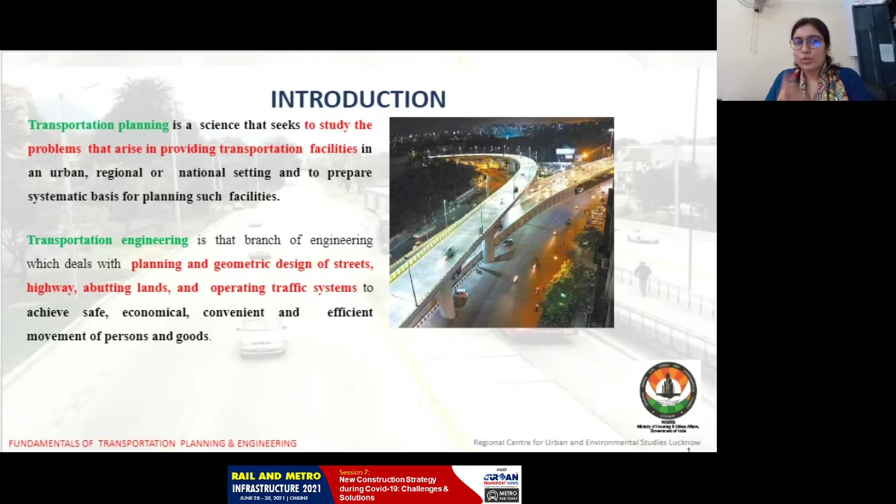So here we are going to discuss what construction strategies will be adopted in the post COVID-19 scenario, as here we are talking on urban transport. So first I would highlight a major difference between transportation planning and transportation engineering, because these two terms confuse us every day about which type of construction strategy should be adopted, either in transportation planning or in the case of engineering. Okay, so yesterday we were also discussing what we should do in a post-COVID scenario.

So when we talk about providing transportation facilities, the problem which we see in day-to-day life is providing the facilities to middle income group people, low income group people, or any of the people in the society who are using transportation. And when we talk about transportation engineering, it is how we design the streets, the highways, the abutting lands, the traffic systems. What should be the design so that it will cater to less population in a small area, or more population in a small area.

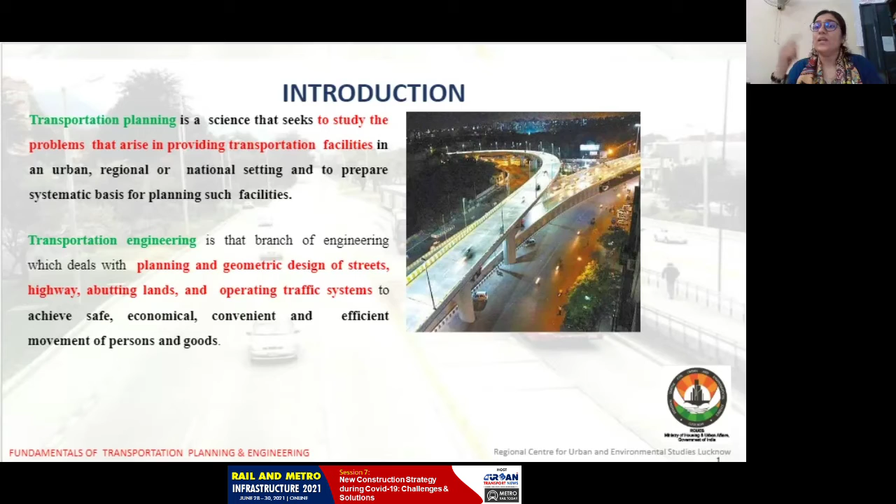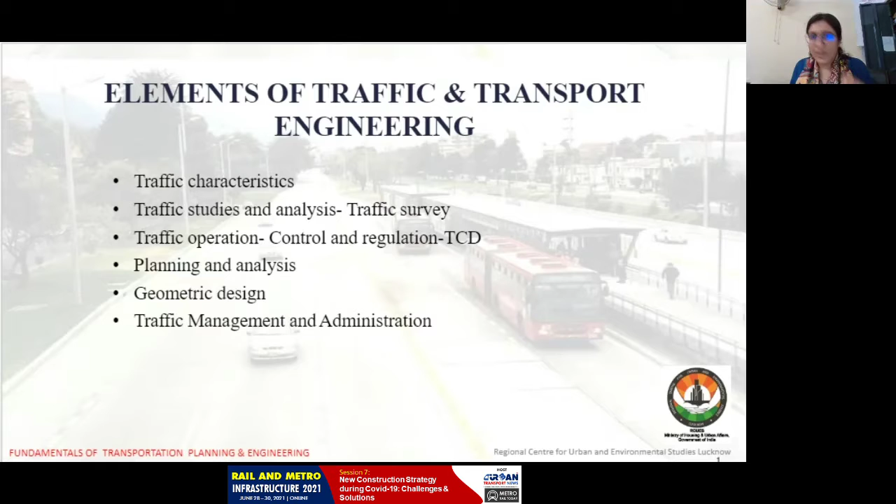Okay, so these two are very important. Before understanding what the construction strategy should be, it is important to understand which type of construction strategy should be adopted, either in transportation planning or in transportation engineering. So here is a small presentation. Strategies can be characterized: there should be separate strategies for traffic, for planning, for geometric designs, and today we also need to adopt good strategies in traffic management as well as in administration. Okay, so here are the factors which affect traffic.

We have four factors: the vehicle, the roadway, the environment, the road user. The road user can be a permanent user जिसको हर रोज ऑफिस जाना है. It can be a temporary user. I am just going to Ahmedabad for one day, I am going to Bangalore for 2 days, so we are not permanent users over there. So this is the road user.

When we talk about the environment, it is very important before any type of design that we go for orientation. Being an architect, I always design a home oriented with the sun and the wind direction. But in transportation planning and engineering, it is the need of the hour that we consider the temperature of a particular area, the heat, the cold, the fog. Because of fog, so many accidents occur every day.

And the roadway types: the different types of surfaces and textures which can be provided, how the drainage affects the population, the weather resistance. These are all factors which should be considered, especially post COVID, not only in COVID but in day-to-day life, but now as we are facing a very huge pandemic, it is the sole duty of planners, transport planners, to adopt these types of strategies.

And the foremost, which is first on the list, is motorized and non-motorized. हमारा जो वाहन है, the vehicle: non-motorized and motorized vehicles must have different types of lanes, different types of transportation facilities. We are going to different slides like this.

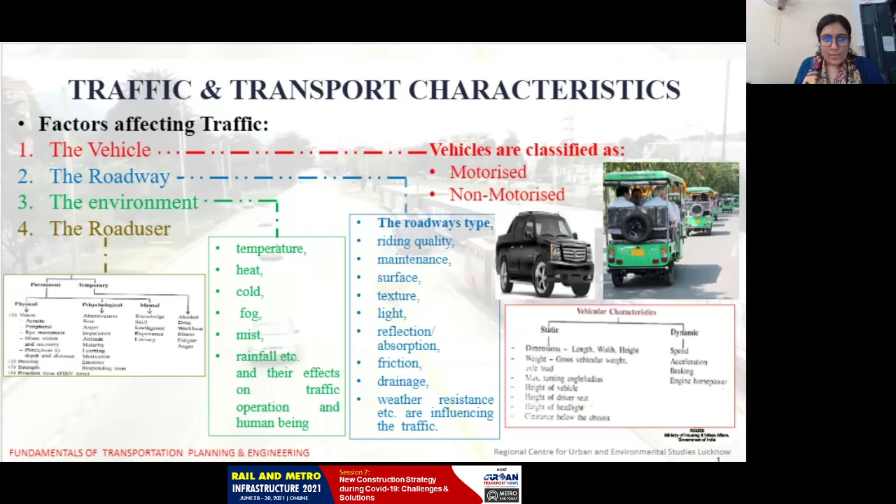Okay, post COVID-19 guidelines for motorized and non-motorized vehicles: it can be an integrated public transport, and social distancing is one of the things. The seats that are not available for the public can be marked using stickers. Seats in the front row shall be made unavailable for the public, the seats which are very near to the driver and the conductor.

On-board CCTV cameras are very important nowadays. Each bus should have one safety supervisor who will be required to guide the people about the safety precautions. Cashless transactions should be there, there should be some IT cards, and there should be retrofitted opening windows to help increase air circulation. This is a design of a bus. This is a design of a metro. These things also come under a strategy.

Traffic police must ensure that there will be not more than 4 people. For example, in Uttar Pradesh there is a Gramin Sewa, the local auto wala. In Delhi there are also some types of autos. Every city has a different nickname; Gramin Sewa is the nickname in Uttar Pradesh. So there should be policies that there should be only 2 persons or 4 persons, and accordingly the rate can be enhanced.

When we talk about shared mobility like Ola and Uber, there should be some post lockdown regulations, like carpooling can be stopped. No doubt, carpooling is a very good option, but under post COVID regulations, carpooling can be avoided for some time. There is very good data: one bus for every 1,000 citizens is the standard, the norm. Countries like the USA, UK, Australia, Japan and Mexico have more than 2 buses for every 1,000 citizens, but India has only 1. The norm should be revised accordingly.

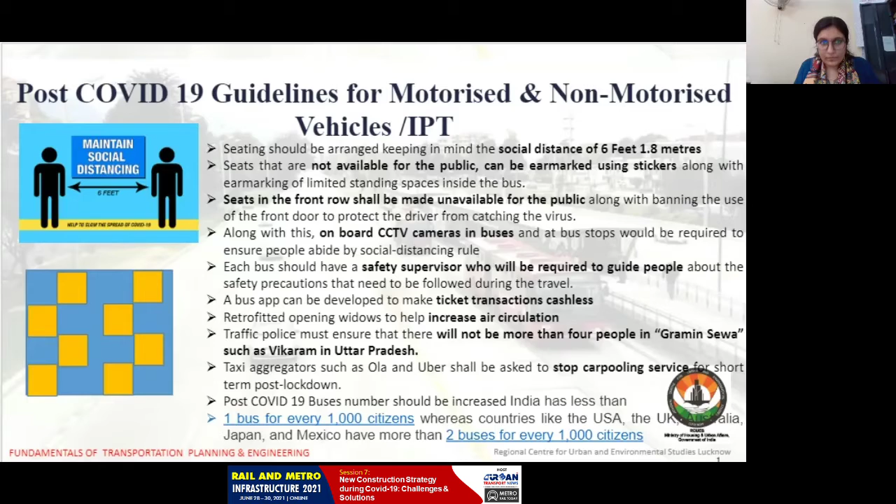There are some best practices for COVID-19 across the world. We can take the example of Melbourne, Australia, where ticket transactions have been made cashless, and the first rows of seats are unavailable for the public. Another good example is the Singapore LTA, Land Transport Authority, which has planned to implement safe distancing measures in trains and bus stops, where

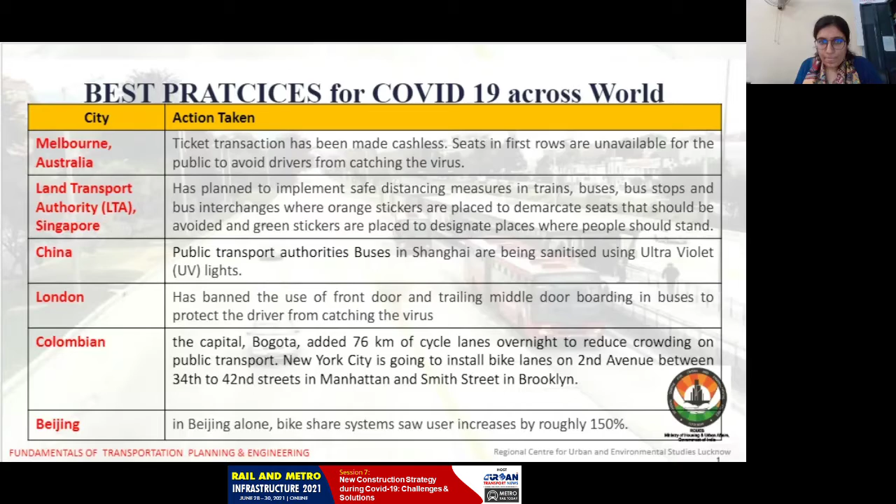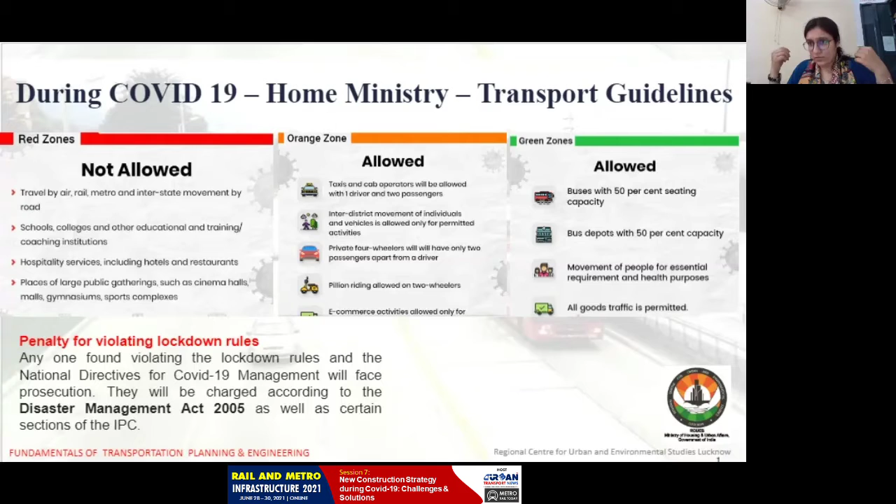There should be a penalty for violating lockdown rules, but in post COVID-19, let's kudos each other so that we can easily motivate. If you are using a metro in the post COVID era, you get some benefits so that you can use the same card in a Big Bazaar or in a Spencer's. If you are using Mumbai metro, you will be able to recharge your phone with 99 rupees of Airtel, so that these types of rewards can attract the public towards public transportation. So these types of strategies can be adopted.

And now when we talk about the construction strategies, these are the things which are missing in our studies. Before any of the studies, we are not doing the traffic volume studies, we are not doing the spot speed survey, we are not doing the speed delay survey. So these are the need of the hour. Before designing anything, we should do the parking survey, we should go for the accident survey. These studies help us determine what will be the need of that particular junction over 15 years, how we can tackle that junction in the coming span of time, either in a case of a pandemic or in day-to-day life.

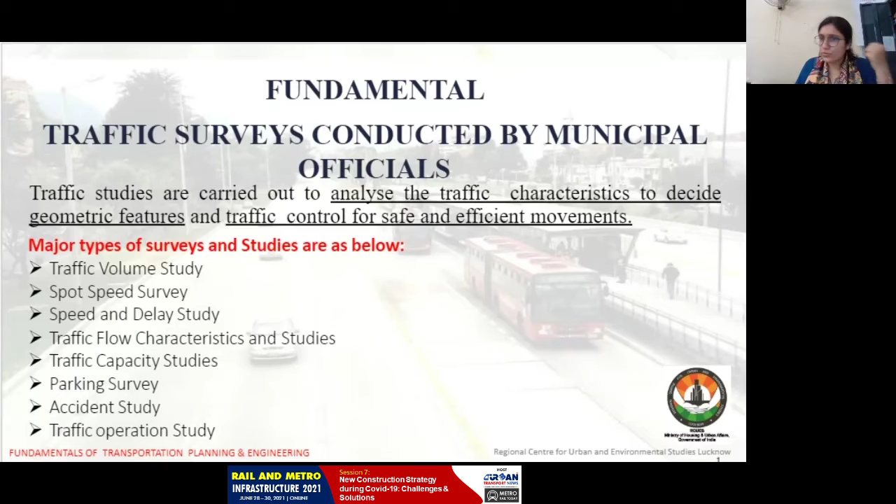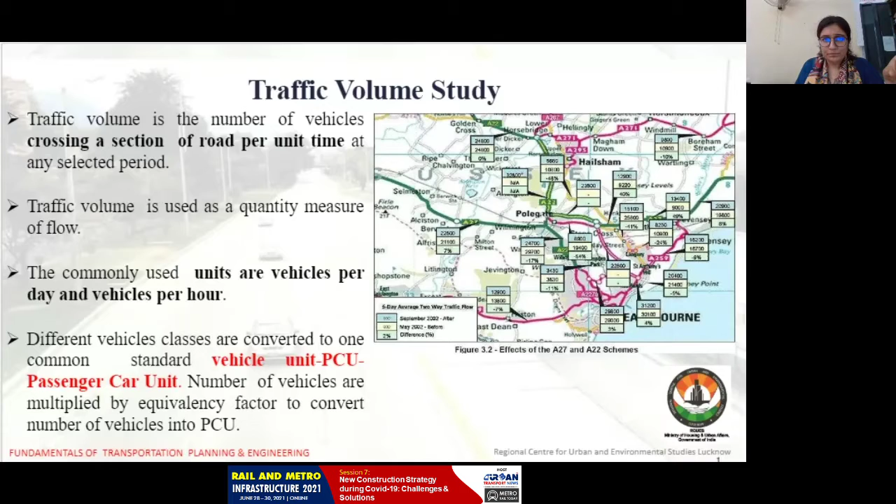So traffic volume study is a study which is the need of the hour, which is going to tell you the units, vehicles per day and vehicles per hour. Vehicle unit PCU, passenger car unit: we must know how many vehicles can stand on a road, passenger car unit. When we talk about the spot speed survey, we can use that equipment, enoscope. So these are the things which must be done.

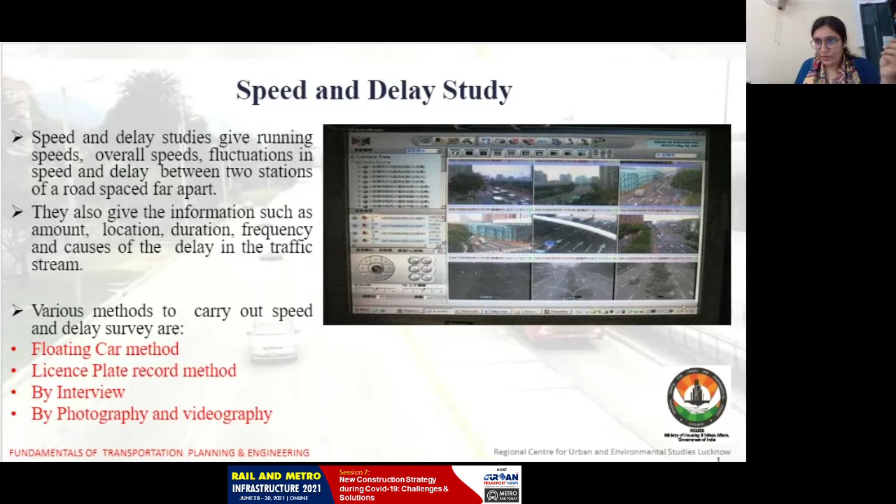Speed and delay survey can be done by various methods: floating car method before construction, license plate record method, by interview, by photography, or by videography. Origin and destination survey must be done before constructing any type of flyovers, any type of a route for city logistics, for urban freight on the roads. Roadside interview method and license plate method can be used. Tag on car method can be used. Home interview method is one of the very unique, very common methods with us.

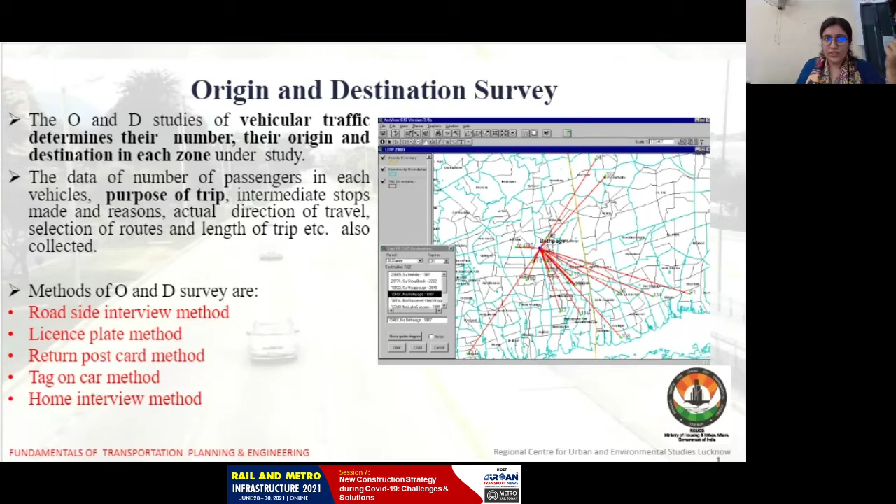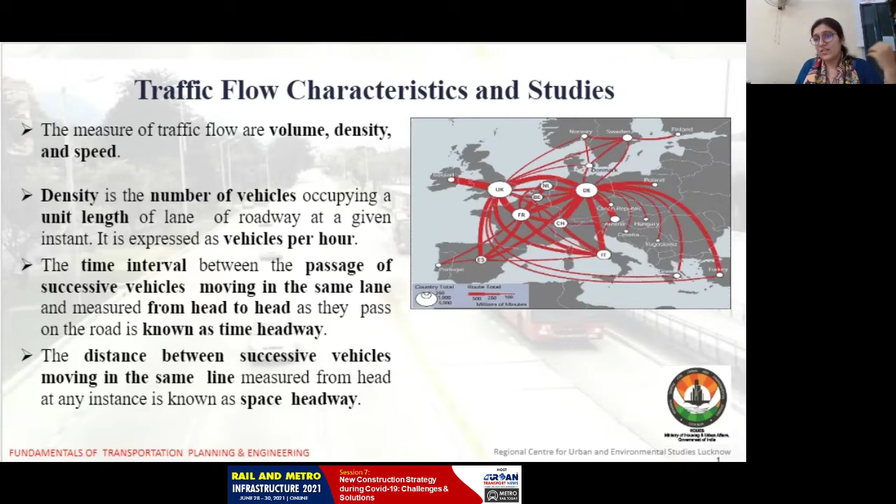So in traffic flow characteristics and studies, we should know what should be the volume, what should be the density, and what should be the speed. We just design a road, we just design flyovers, we think that a flyover is going to reduce the congestion, but I'm so sorry, the need of the studies before constructing anything is very important. Traffic capacity studies are very important, where C means the traffic capacity, which can be derived with this formula, 1000 V by S. So this is just an overview of that particular concept.

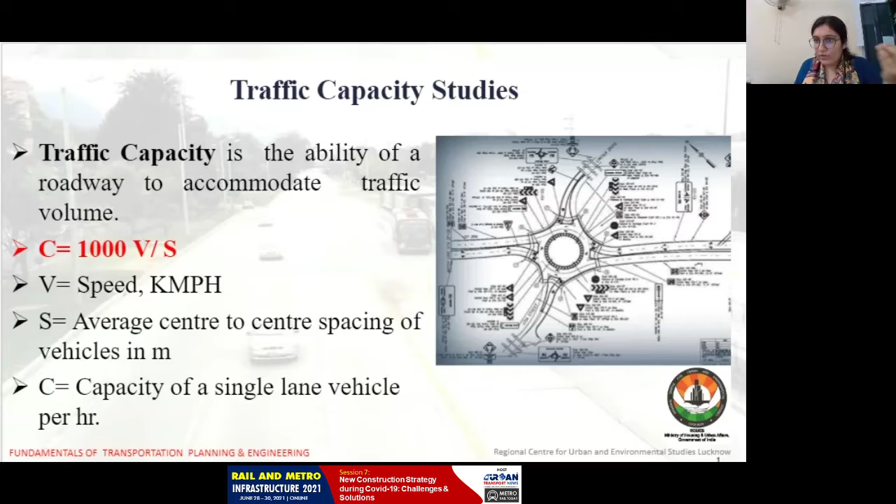Parking survey is very, very important, because already in India, the metro, the railways or the BRTS do not run on the need, they run on the culture of the particular city. For example, Delhi has that culture, a city which caters to people of different cultures from all over the states of India. There are some people from Bengal, from Mumbai. They come to Delhi to fulfill their needs, to fulfill their ambitions. So they prefer metro so that they can save a penny, save some money.

When we talk about Lucknow, the localites of Lucknow have a Nawabi culture. They are not going to prefer metro the same way. A person is going to prefer metro in Delhi, and the same concept will be there in Ahmedabad. When we talk about Ahmedabad, it is also a cultured city. They prefer to use their own vehicle. So India is a country where, no doubt, culture is impacting public transportation very much.

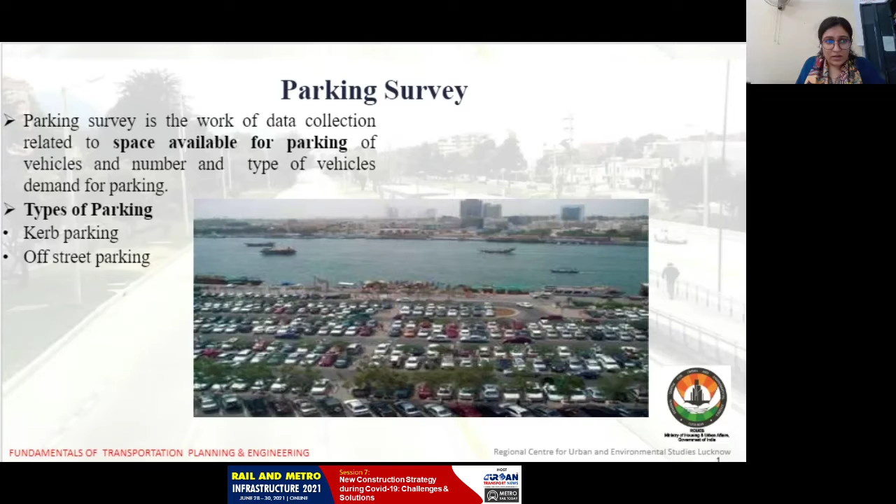At most, we have 4 persons in a family and 3 cars in our parking area. So nowadays we are going more for private transportation instead of public transportation. So it is very important to create these types of parking spaces which will not affect the pandemic much, which will cater to the maximum cars but the minimum public. For example, we can say maximum governance and minimum government. So there should be various types of parking: kerb parking, off-street parking, and how parallel parking and angle parking are different. This is one of the very important things that can be adopted when we are designing, planning, constructing, implementing or executing any type of parking space, out of the various angles of parking.

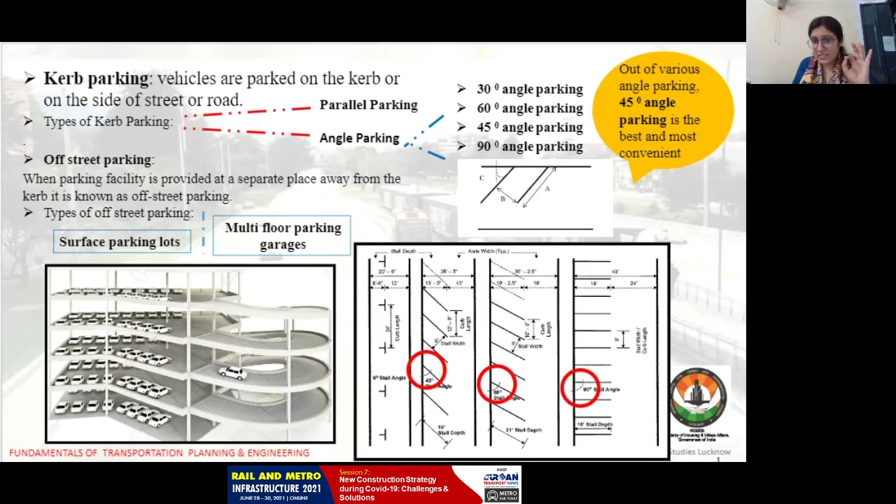45-degree angle parking is the best and the most convenient method, which can be adopted in a less amount of space also. And accident study is very much important.

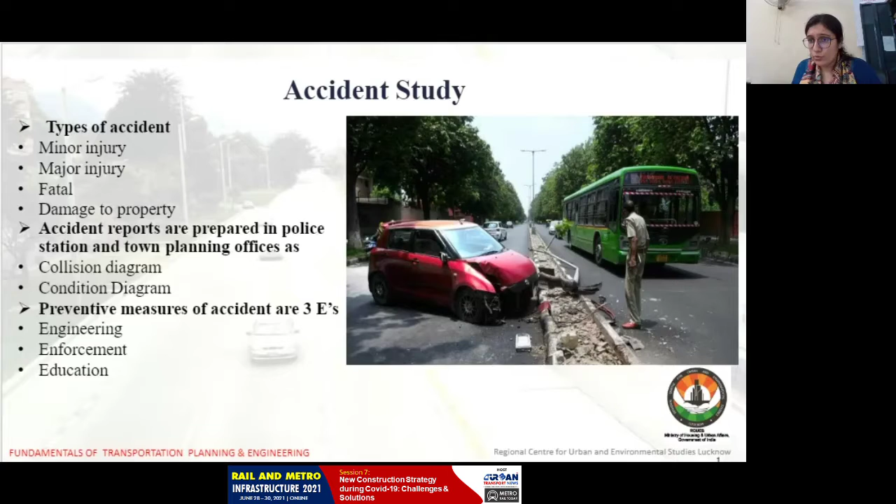diagram. And preventive measures of accidents are 3 E's: engineering, enforcement, and education. Education here means awareness. Awareness here means IEC, information, education, and communication. It is very important लोगों को communicate करना, उनको inform करना, educate करना, उनको बताना how to do all these things. So IEC is also the need of the hour. Capacity building is also one of the very important methods.

Here is a very important information for you all: traffic operations. When we operate a road, when we operate a different vehicle, there should be some traffic regulations. We are aware about the traffic regulations such as issue of driving license. We are aware about the registration of vehicles, transfer of ownership. We are also aware about the speed limit. We are also aware about the limits of weight, but we don't follow them. This is a main problem.

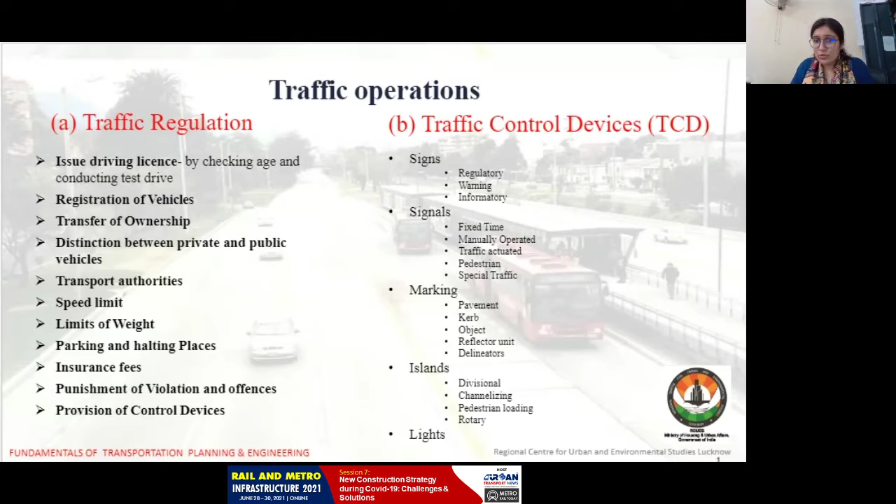And one thing, there are traffic control devices on a road, which is the sole duty of the municipal officials, the particular authorities of a city, that there should be proper signages. हमको सिर्फ एक साइनेज पता होता है कि लेफ्ट और राइट, यू टर्न, राइट टर्न. Signages are 3 types. Regulatory signages are different. Warning signages are different. Informatory signages are different. There should be particular signals. There should be a proper marking area, island, and lights.

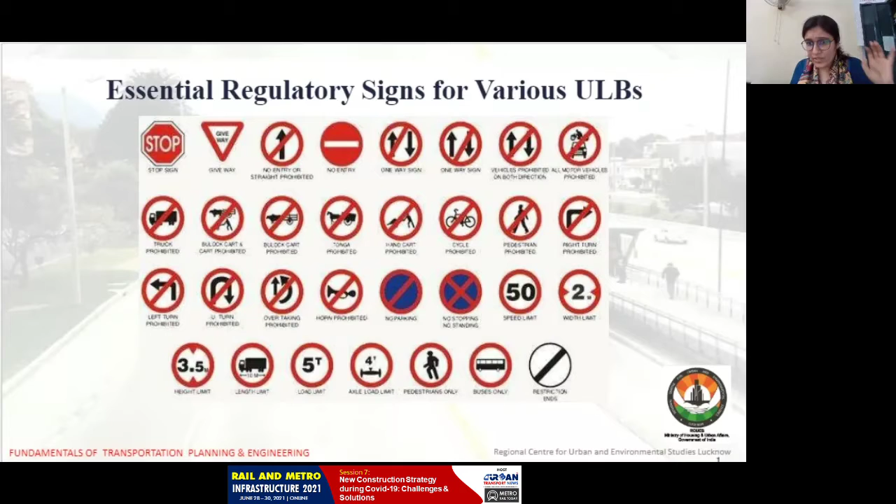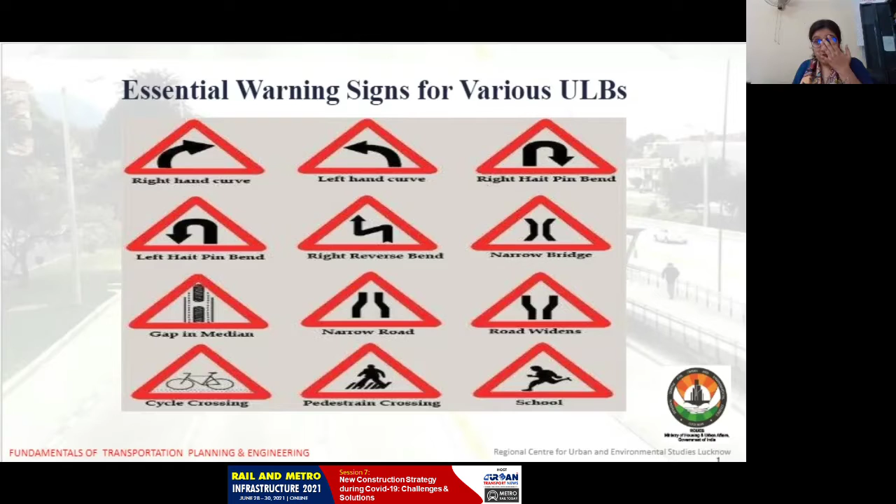So a pada likha vyakti, when driving, an educated person is going to see, okay, here are some COVID cases, or here is a hospital nearby, I have to take a right hand curve or a left hand curve. So accordingly, signages are going to regulate the janta, regulate the public who is driving. So this is the need of the hour: cycle crossing, gap in median. So signages are definitely going to help in the post-COVID scenario, which can be an essential part of the post-COVID-19 construction strategies.

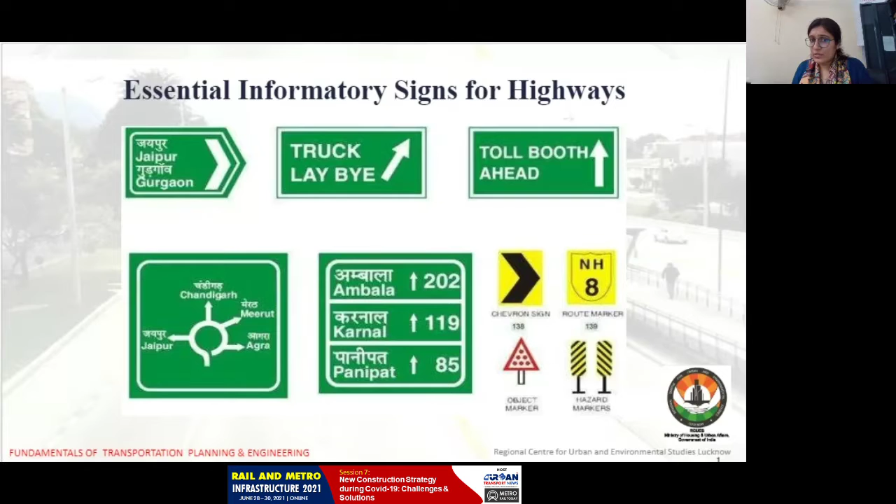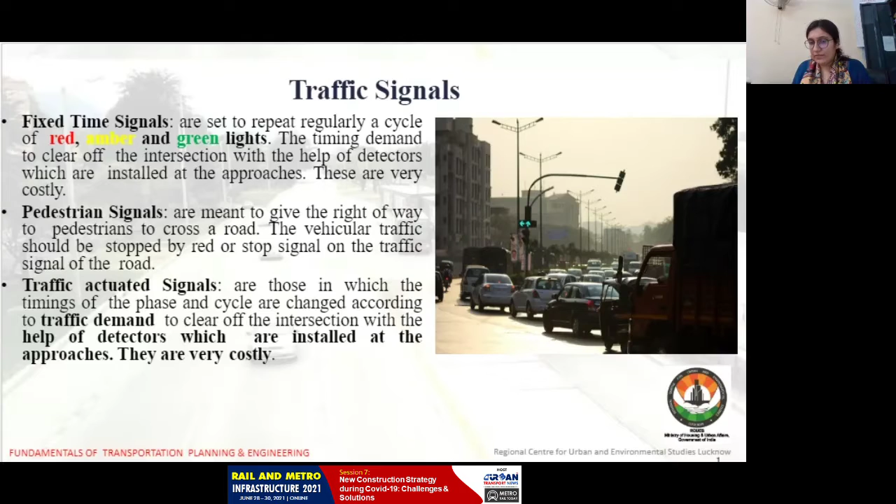Traffic signals, the 3 lights we are aware of since our 2nd class when we were studying in the schools: red, amber, and green lights. But they have different roles. So nowadays they can be operated with an integrated command and control center, where the lights can be turned according to the traffic available on the road. So these type of intelligent traffic management systems can be integrated.

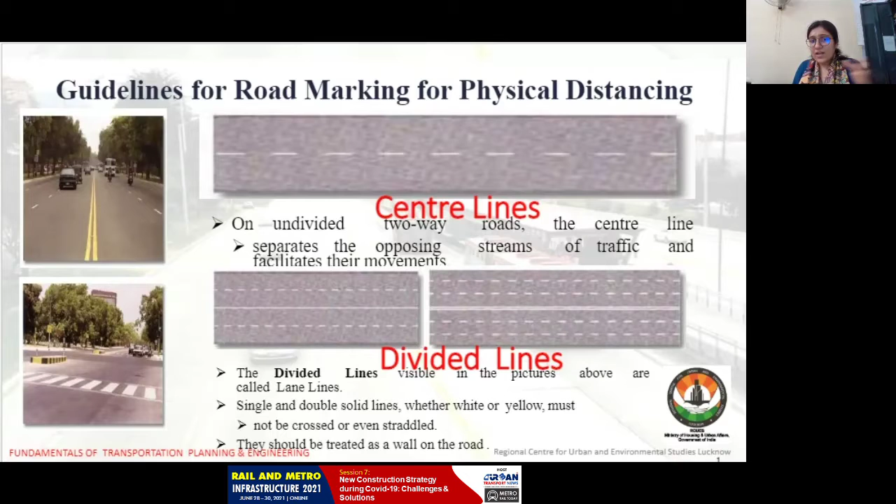And before designing the roads or before doing any type of construction for a metro, the role of road marking, the role of area marking is very important. For example, center lines where we can divide the public like this. One is coming जिनका टेम्परेचर चेक हो गया है, another is coming जिन्होंने सैनिटाइजर ले लिया है. इस तरह का जो सेंटर लाइंस हैं, डिवाइडेड लाइंस हैं, double lines, combination of lines.

Important core transportation engineering, which is very very important, post COVID or pre COVID, doesn't matter. There should be lines on each and every road, whether the road is local, arterial, national highway or collector road, any type of road. There should be these types of signages.

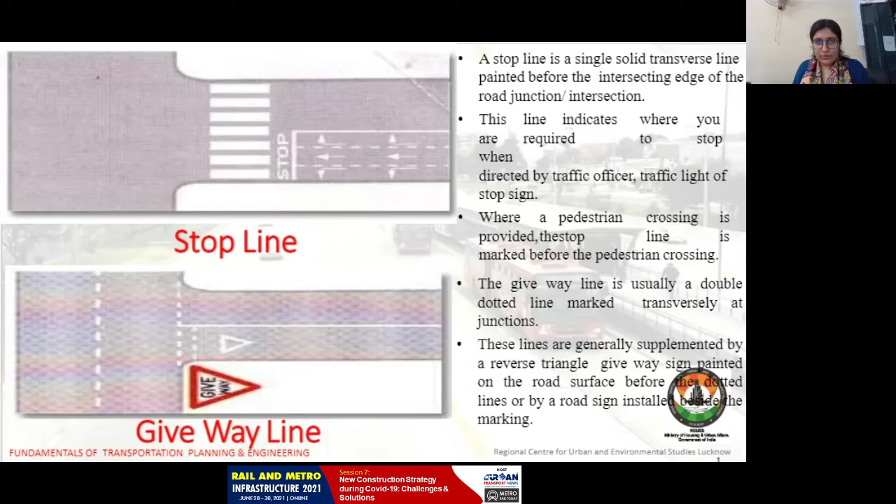Parking prohibited lines should be there. A yellow box junction should be there. Pedestrian crossing should be there. And road delineators for social distancing are very important. Hazard markers are there. For social distancing, object markers are very important equipment here. So this can be over there.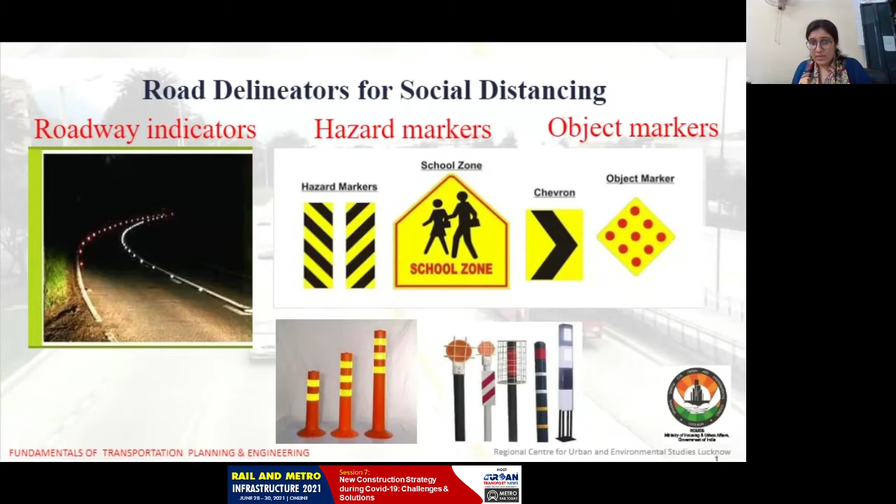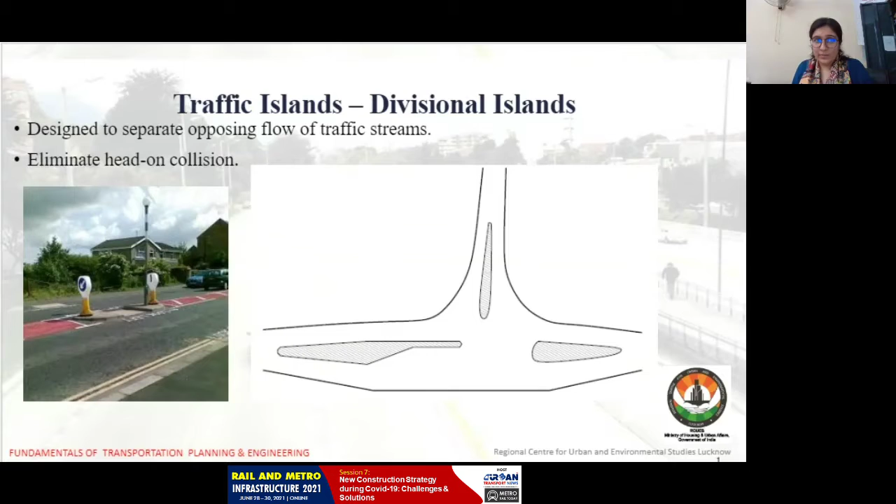So forms of intersections are there. T intersection, cross and staggered, these types of intersections can help us to intersect the traffic, which can ultimately result in some reduction in our congestion.

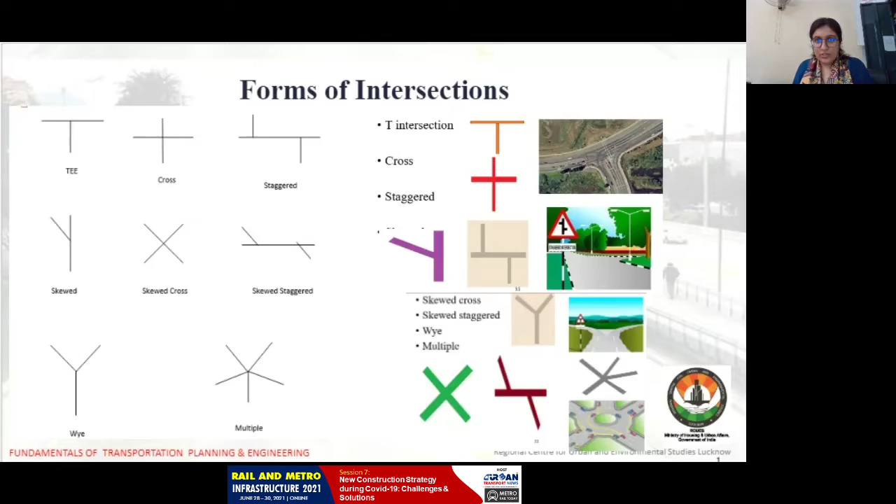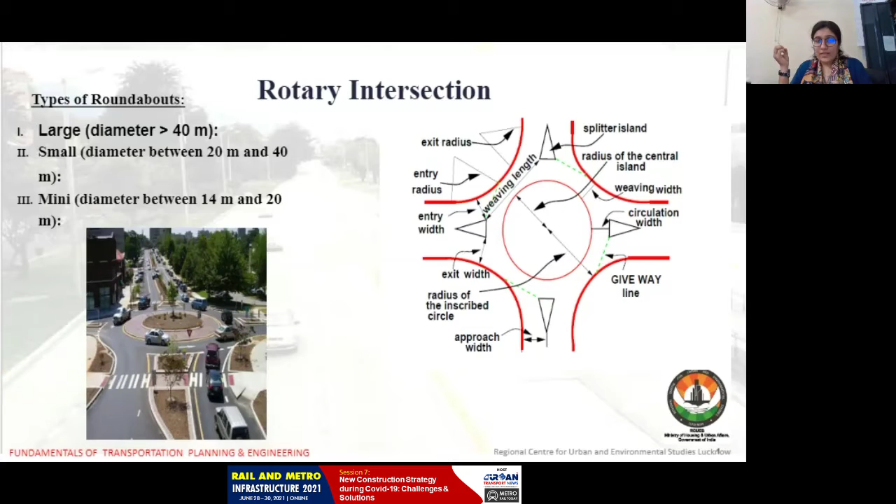So when we talk about a rotary, it is very very important. We also have one or two rotaries in our nearby cities in a radius of 5 or 10 kilometers. So the diameter is very important. Why is it important, greater than 40 meters? Because in very large cities it can be like this. In small cities like Ambala or something else, the diameter can be between 20 to 40 meters.

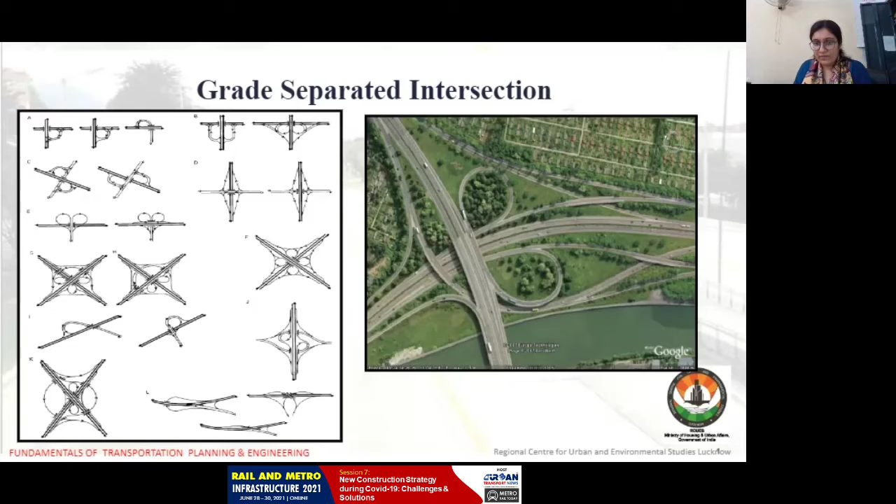So the conclusion is that these are some basic concepts of traffic engineering if and when they are adopted on our roads. Obviously our roads are going to be enhanced, contemporary and modern, and the routeways of metros and railways are going to teach us how to deal with this. So all the elements are important to understand for better implementation and operation for the various officials and urban local bodies.

The traffic department has a very important job of managing the traffic. Traffic police should be guided on how to make traffic discipline. Traffic rules and regulations are also important in the case of good strategic design post COVID-19. And at last, everyone forgets about service level benchmarks. We must focus on service level benchmarks accordingly. So thank you, stay tuned.

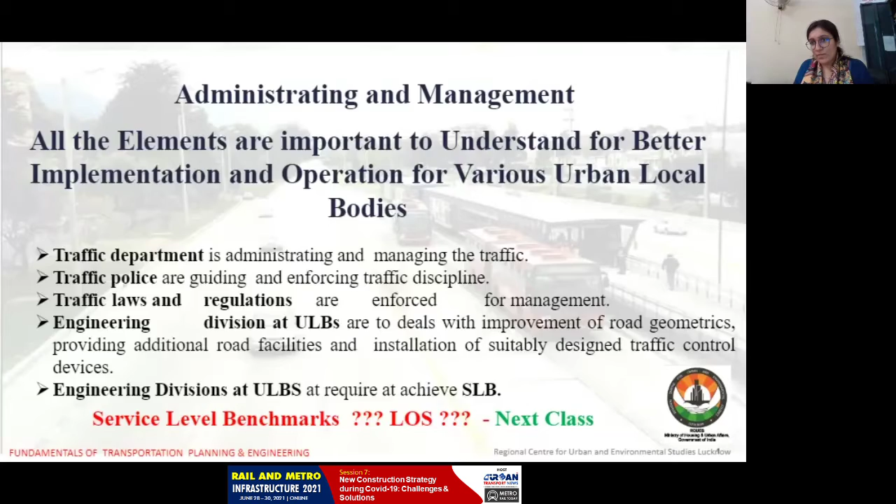Thank you, Priyanka ma'am, for your presentation. We are grateful for the time and effort you took to share your thoughts on transport planning and engineering and enlightening us about the opportunities of the traffic system. Now I'll invite Mr. Saurabh Mukherjee to present his thoughts. Over to you, sir. Thanks for the invite. Good morning to everyone. I will try to present my slide first.

Good morning, everybody. Hope everyone out there is safe and sound with their near and dear ones. We all are going through extremely challenging times, probably the most unprecedented era in human history. But as they say, while there is hope, there is life, and life moves on. So before I start, a quick little introduction about myself and the E2E Rail family, which I belong to, before I jump to the main topic.

My name is Saurabh Mukherjee. I represent one of the fastest growing MSME companies in India right now in the infrastructure space, which is the E2E Rail group. We are into engineering and construction of rail infra in India, and are among the few very fortunate companies who have registered 50% year-on-year growth even during the severe pandemic times, when almost 4 to 5 months of our business calendar was washed out because of the lockdown, and with zero fatality. So that is the most important part of it.

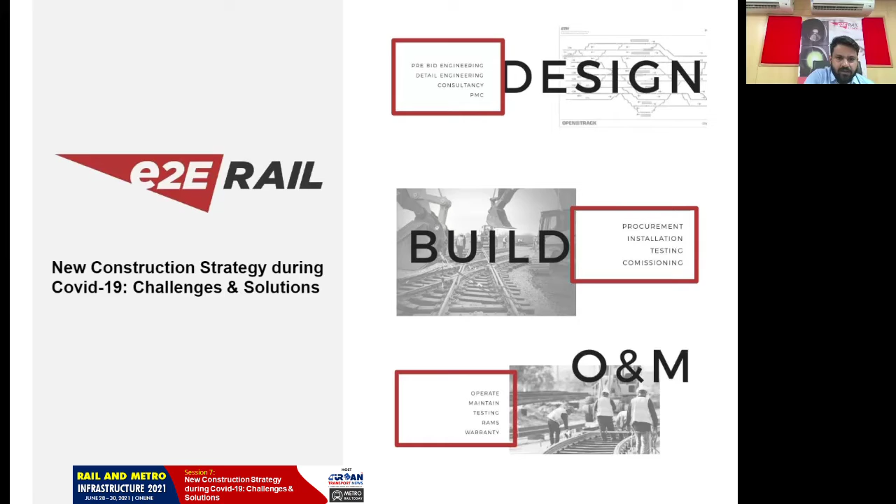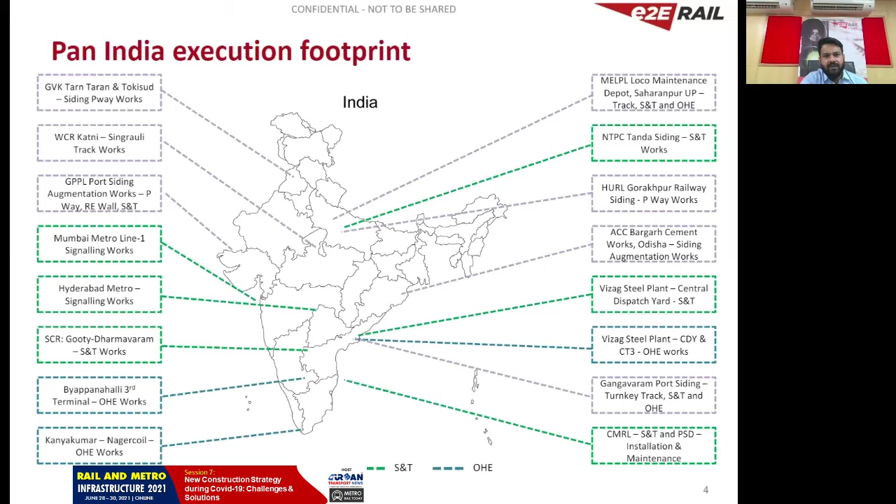We primarily work in 3 segments. Basically, we have around 500 people and we work in 3 segments: signaling, track and electrification, and we have a pan-India presence across the business segments.

Okay, so coming back to the main topic today, which is a very interesting and pertinent topic to be discussed right now: the strategies which need to be adopted by companies in the construction industry today. In these uncertain times of COVID-19, what are the issues we are facing? What kind of strategies can be adopted to remain relevant as well as successful in the coming times?

So I shall share some real life examples of how we as a company, E2E Rail, have gone through this, and I think we are considerably successfully sailing through it, with the utmost safety and well-being of employees as our ultimate focus, without compromising on the growth path.

Now, this pandemic has affected communities globally, with more than 30 million reported cases in India alone, and there have been unfortunate lives lost, more than 4 million across the world, and the numbers are still counting. Our governments and the companies, we as companies, are all trying our best to respond fast, but still much

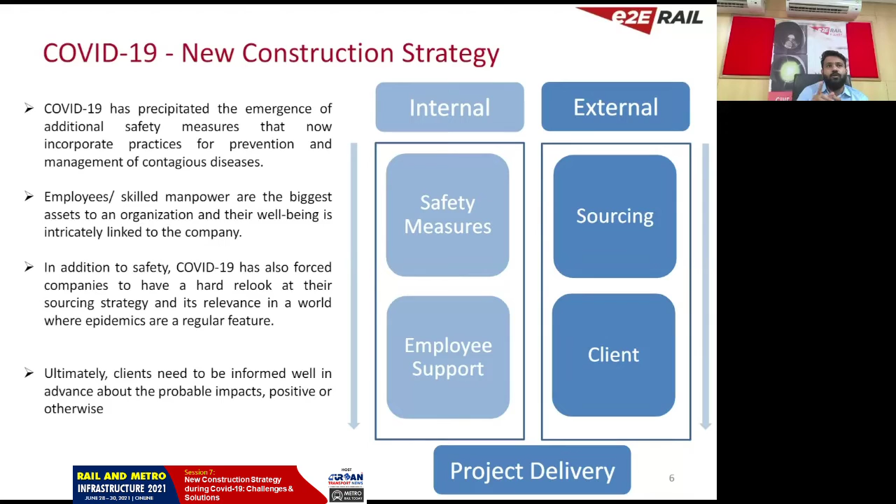If we talk about the stakeholder part of it, client confidence is extremely important to keep intact. For improving the infrastructure, there needs to be expenditure, and that expenditure happens through the client. So client confidence is extremely important, and so is maintaining the cash flow for the entire ecosystem. So we need to continuously adopt strategies which create confidence in the end consumer, or the end client for any B2B organization, right?

So now the question comes: what did we as a company actually do at the ground level to meet this challenge and come out of it, or we are still in the process of coming out of it successfully, right? As a company, we prepared a business continuity plan, which we all know as BCP, right? And divided it into two parts: one is internal and the other is external.

We created focus groups inside the organization who concentrated on creating awareness to contain the spread, take appropriate measures so that infections are limited, and create infrastructure for attending to the emergencies of the people working at different sites. Then provide them facilities for the cure also, because this was an unprecedented situation.

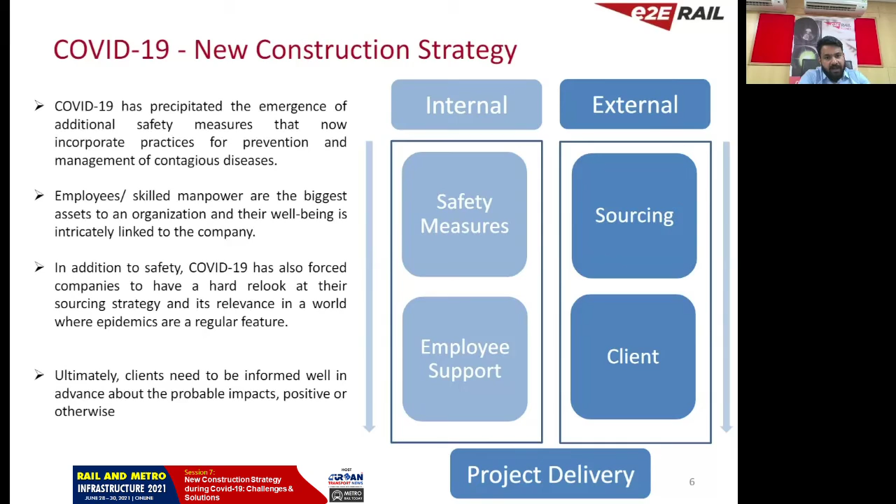Those people were really relevant, because you cannot contain the spread unless the entire ecosystem has been checked all across, right? So all the employees and the subcontractors were continuously trained on COVID-19 appropriate protocols, and the PPE kits were also made mandatory, right? So these are some of the measures which we have been doing continuously over the last, say, 12-14 months in different sites.

We created even isolation wards at each location with basic medical infrastructure, gave them telemedicine support and an on-site testing process for every location. We even tied up with reputed doctors and medical facilities at the site level to address any emergency for our employees. See, our employees who are working at the site, it's a construction industry, these are related to people. So if the people are not being taken care of, we cannot run the show.

Specifically during this challenging time, right? We currently have 22 running sites across India, and I'm very proud to share that almost 80% of our employees in the 18 to 45 range have got the first jab, and 90% of the 45 plus employees have completed their full vaccination schedules.

For the corporate employees, we adopted a work from home policy with continuous monitoring of the productivity levels through different kinds of digitization tools, software tools. We also kept them motivated through various kinds of engagements, almost on an everyday basis, where we created platforms for exchanging ideas, brainstorming sessions, and some stand-up meetings where even I personally went to interact with everybody every morning to keep up the morale and the confidence of the employees.

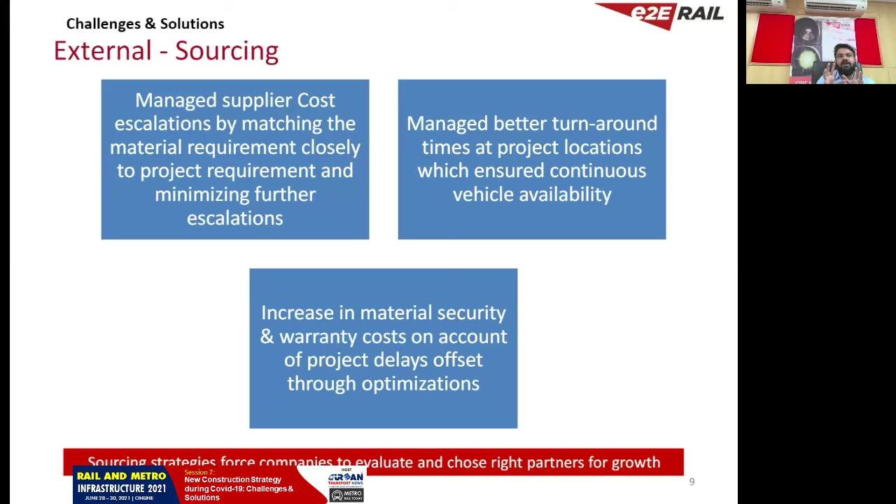The key word was to instill confidence and keep a continuous channel of communication, informing them of each of the deviations on the critical path and the project delivery timelines and the revised workarounds to meet the targets. There will be delays. Obviously, there have been delays because of the lockdowns and stuff. But it is important that we keep that communication channel always on.

We formed a team of the most experienced people in the company, segregated this entire customer base between them, and made a single point of contact for each of the customers so that there is a continuous flow of communication, and say that, boss, we have taken a little bit more time, but this will be made up in this way, right? This helped in maintaining the customers' confidence in the capability of the company.

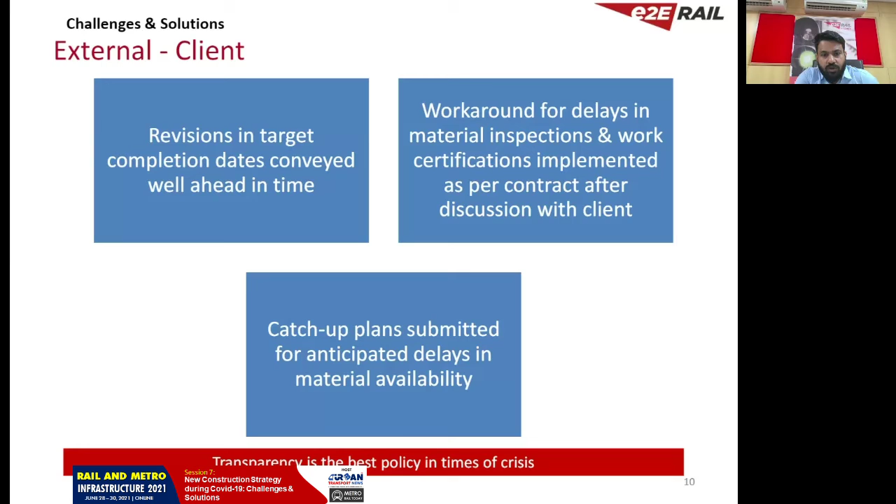So that's something which I wanted to highlight about how we fared as a company through this crisis, right? I'm just sharing the examples. Now, recently when I was trying to think about the strategies, what should be going forward, what type of vision we should keep, right? I came across a very interesting article on the McKinsey portal where they highlighted 5 key aspects to handle the new normal. So in our life we have a new normal.

In our business also, in the construction industry also, we have to adopt this new normal, right? So we made it on a 5 dimensions basis. Number 1 is resolve, number 2 is resilience, number 3 is return, number 4 is reimagination, and number 5 is reform. Now, we need to be very much resolved to address the immediate challenges that COVID-19 represents and act accordingly. We need to be determined and keep doing whatever we are doing.

We cannot lose out in the middle. So we cannot interrupt or we cannot stop in the middle. We need to have clear-cut strategies for returning to the momentum, what we have been doing pre-COVID best, and we have to have clear-cut strategies around that.

Now, the reimagination part is a very important aspect. The world has been changing to a different aspect. There's a paradigm shift in how the business will be done post-COVID, right? So, taking all those into cognizance and trying to find out the implications, how all these companies and institutions should reinvent their strategies. So we'll come to the next slide where we will try to see how we can go through, right? And reform.

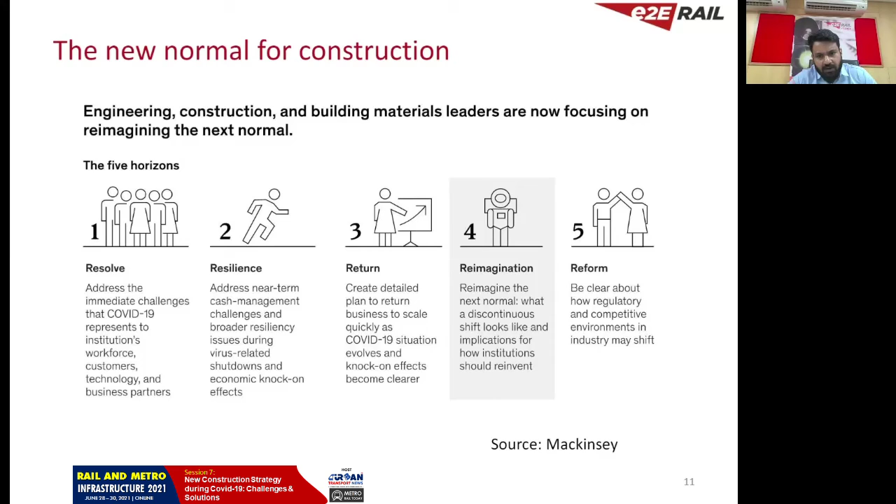Now going back to these 5 horizons, if we carefully study them, we can arrive at some strategies which the companies might adopt. So this is my version of it, how I have thought about it. There are several respected panelists today also; they can also give their comments, right? So the first one is digitization and upskilling. More and more companies need to converse themselves with the implementation of automation for the process and tools for remote monitoring and managing.

We have seen the evolution of the BIM tools in the construction industry, and this is the time when these kinds of tools shall further evolve drastically to suit the organizational requirement, and an organization needs to adopt these kinds of tools to automate the process and digitize and invest heavily in upskilling and development.

The second part is the controls and optimizations, which is key in managing an effective and streamlined operation structure. In these times, the silo-based departmental working is gone, boss. One has to wear many hats, and cross-skilling and a multidimensional workforce needs to be cultivated in the organization.

Third is building the SCM resilience, which we already talked about. The entire world has to really look at vertical integration to find more solutions from the supply chain perspective. They have to look much more in depth at how to automate the process of the supply chain and get into an aggregator model rather than just a single material based model. That is a very important key aspect for a construction company to be successful in the coming days and not depend on a single supplier based structure, right?